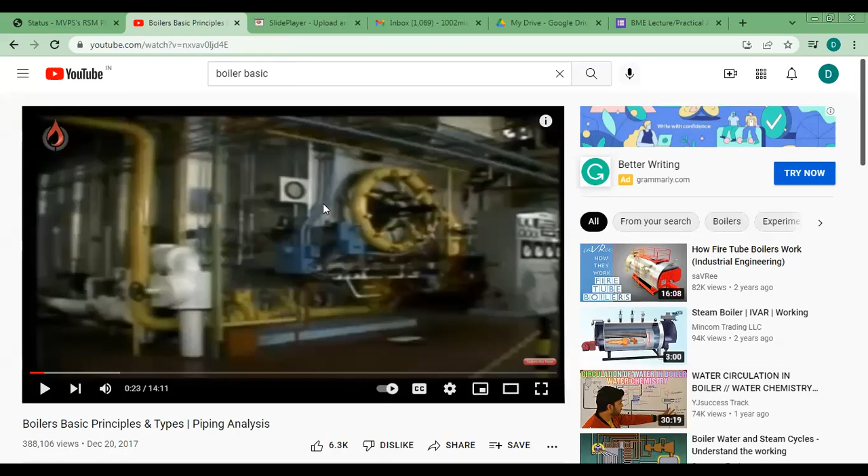Okay students, for the basic concept about the boiler, I will show you this short video.

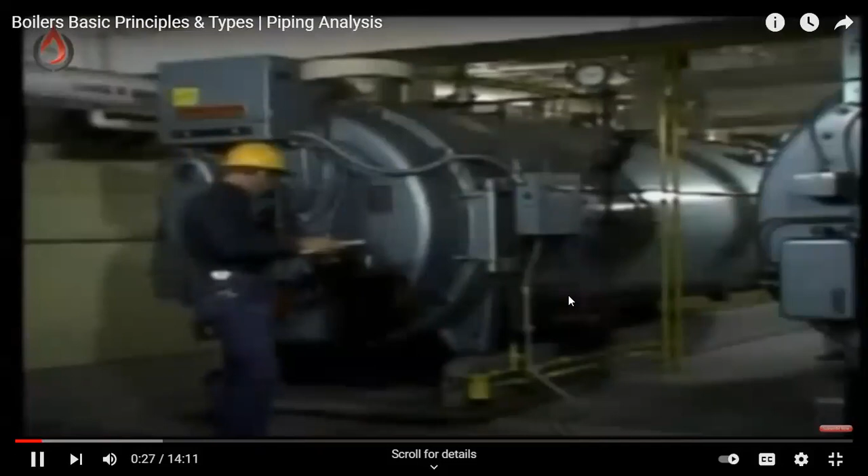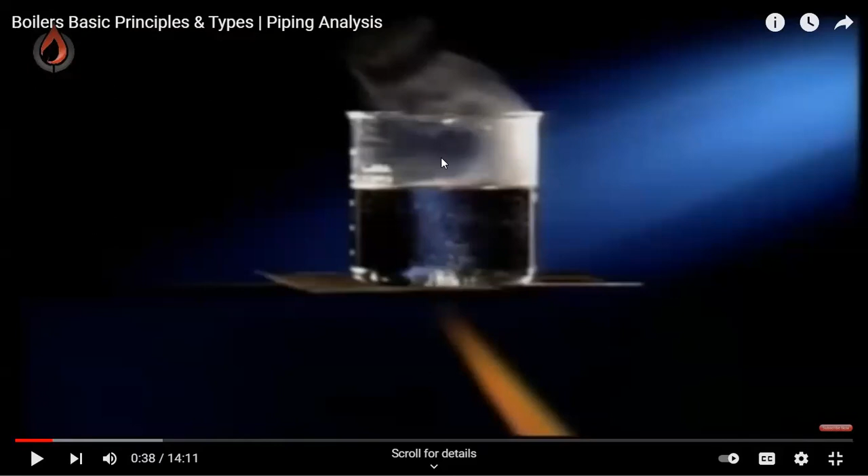In this process, what we can see is we give heat to the water and the water converts to steam. This is the simple phenomena: when we increase the temperature of water, the water converts to steam, and this phenomena works as a steam boiler. So the meaning is that we can generate steam by increasing the temperature of the water.

The same method or technology is used to generate steam in a boiler. So a boiler is nothing but what its name explains - boiler means boiling. The boiler is the equipment which boils the water. Now, many other equipments are there which also boil water, but...

they don't call those a boiler, because a simple vessel is also used to boil water and convert it into steam, but we can't say that vessel is a boiler. A pressure cooker also converts water into steam, but a pressure cooker is not a boiler.

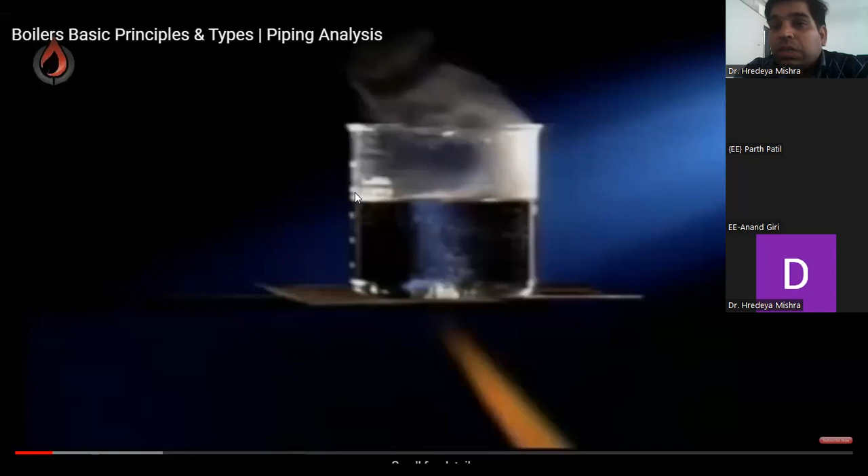So what is the boiler? The definition is: a boiler is a device or equipment which converts or generates steam at a specific pressure, with a minimum pressure of 1 bar. So if equipment generates steam at a specific pressure of 1 bar, then only we call it a boiler.

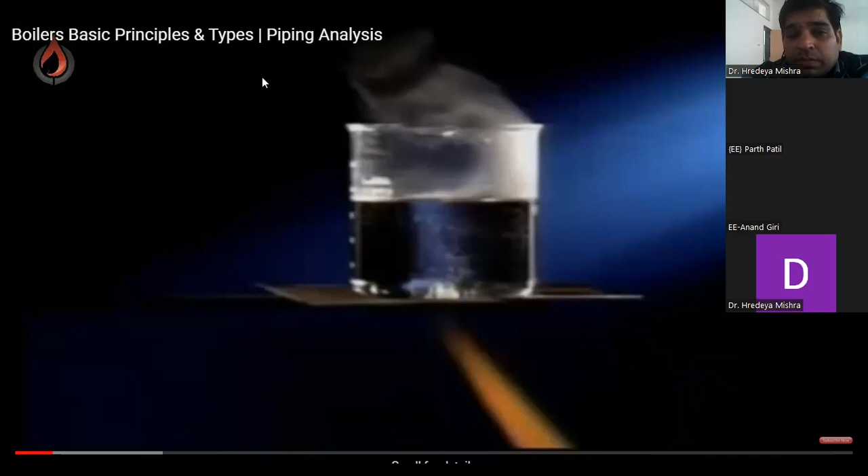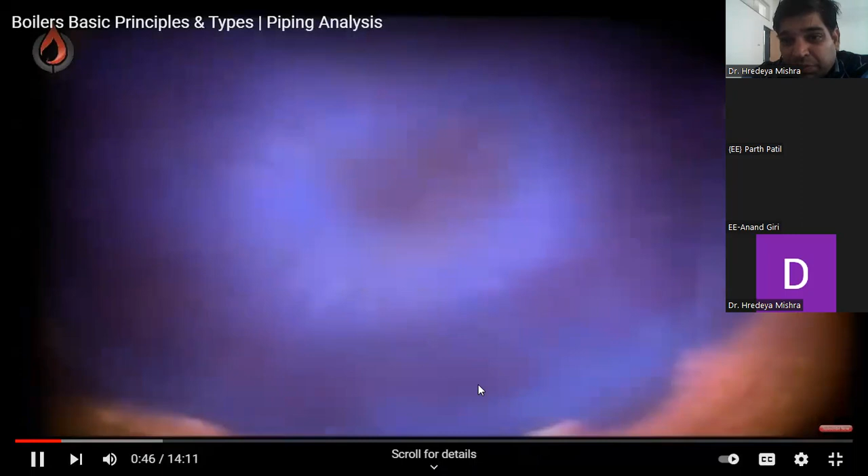Okay, see this video. Steam is generating here, and this is the flame. By this flame, water is boiling, and the phase is changed from liquid to vapor.

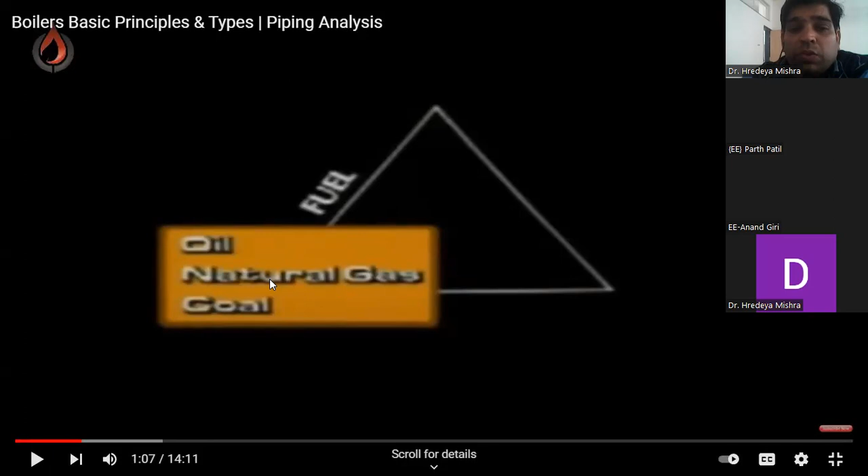Now see the cycle: fuel. What we can use as fuel - oil, natural gas, and coal. Air, oxygen, because in the absence of oxygen, fire is not generated. For fire generation and fuel burning, oxygen is required - that is the air.

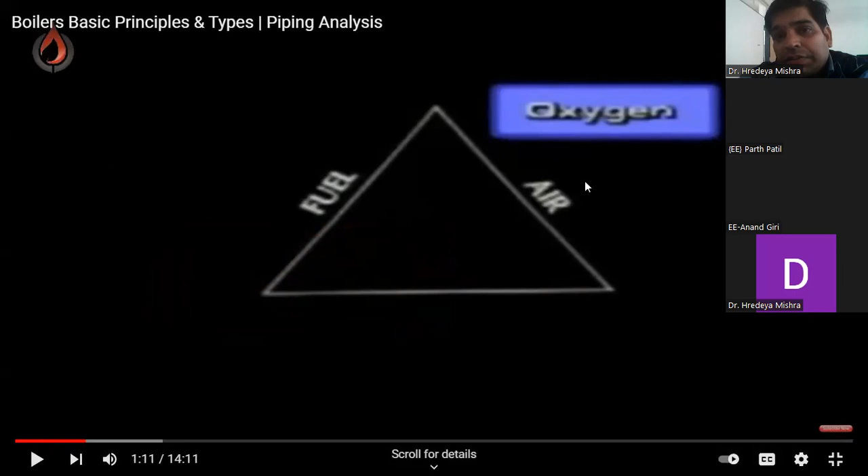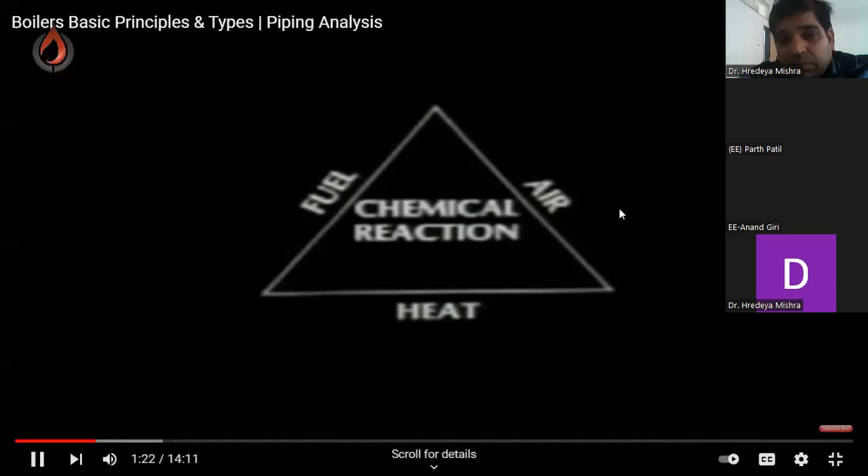And heat. See - heat, fuel, air, and now this chemical reaction happens. And what does this chemical reaction do? This chemical reaction heats up the particular vessel or boiler.

Now this is a closed vessel, but what happened here? This is the closed vessel, but for the presentation purpose, this section is open. So from this, we create the heat, and now the water is boiling, and see here the upper portion is generating steam.

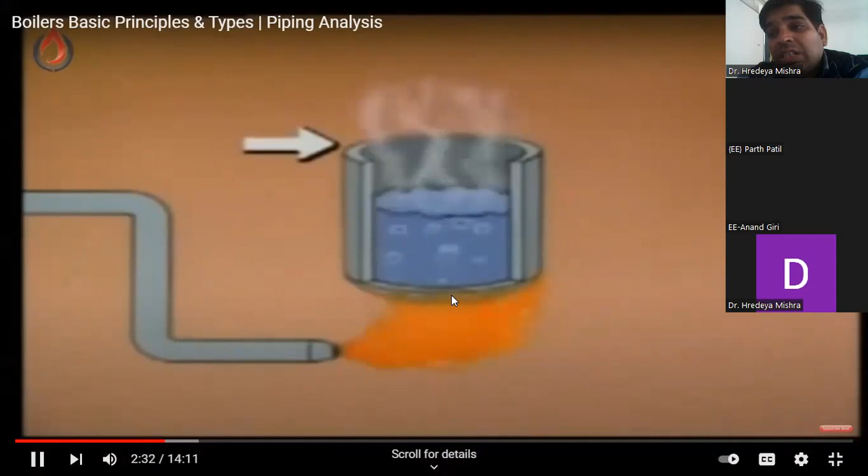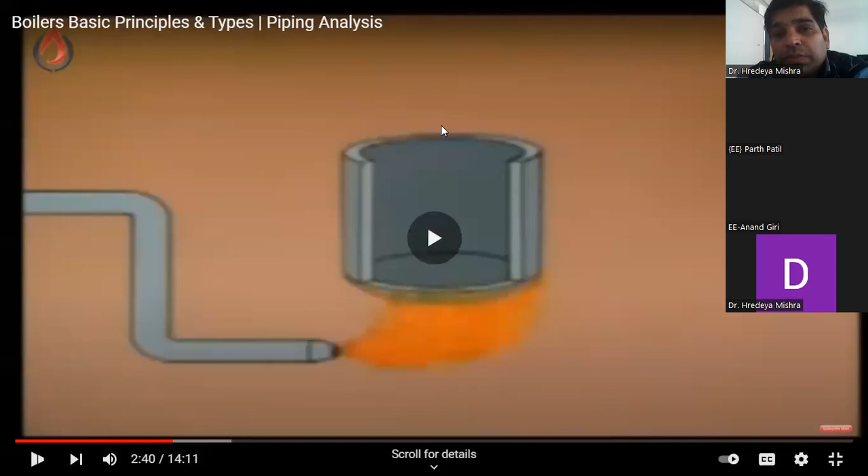Now see, in the previous example, the upper portion is open. In this section now, what we can do is provide a cover on the upper side and make a pipeline to supply the generated steam.

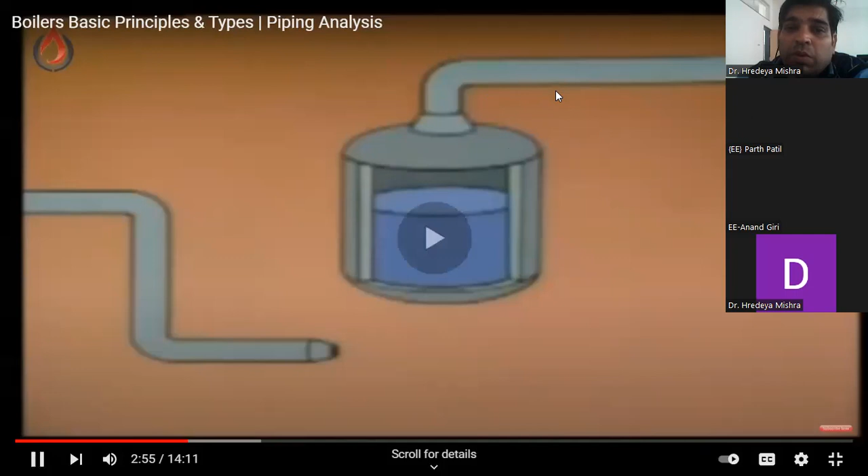Now what happened - you can observe that this pipe is for water supply. In the previous example, the total water was converted to steam and the vessel became dry, meaning without water. Without water, the vessel would be damaged. So this is the water supply - continuous water supply is there.

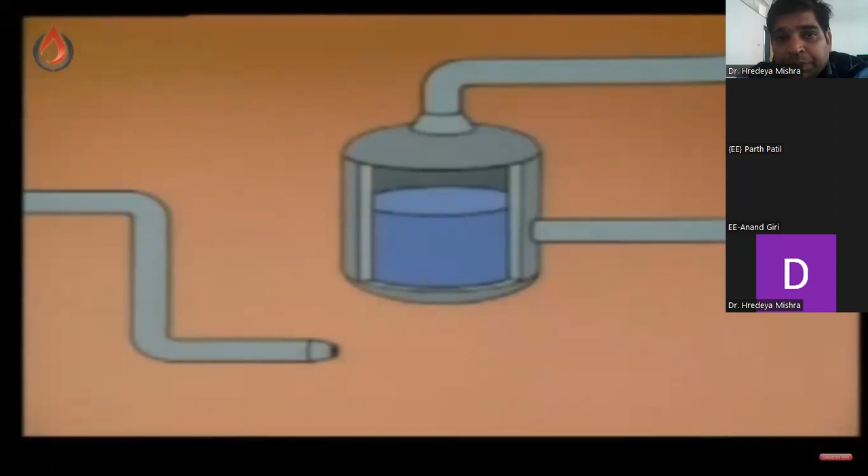So we maintain the water level, and here what happens - flame is generated, and this available water converts to steam, and this steam is transferred through this steam pipe. Now observe this operation: the water supply is continuous, so the water level does not reduce, and steam is properly generated and passed through this steam pipeline.

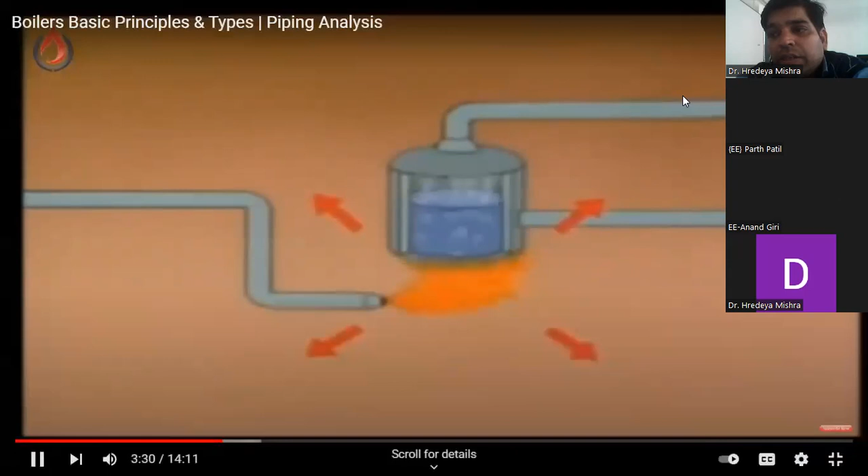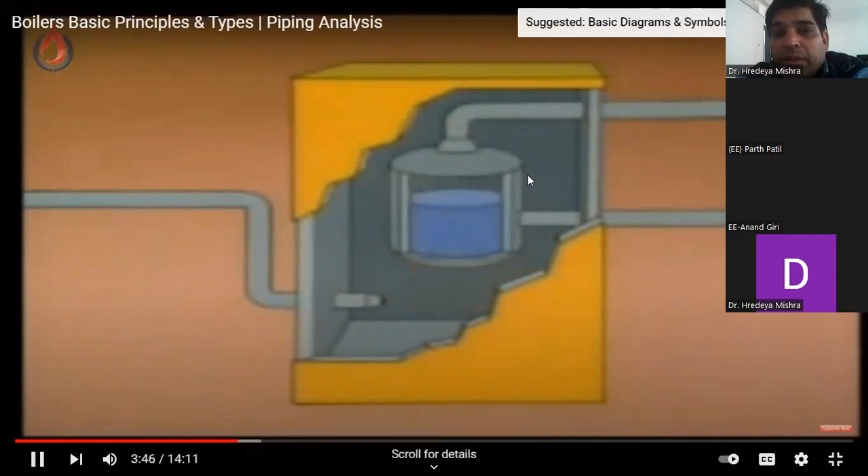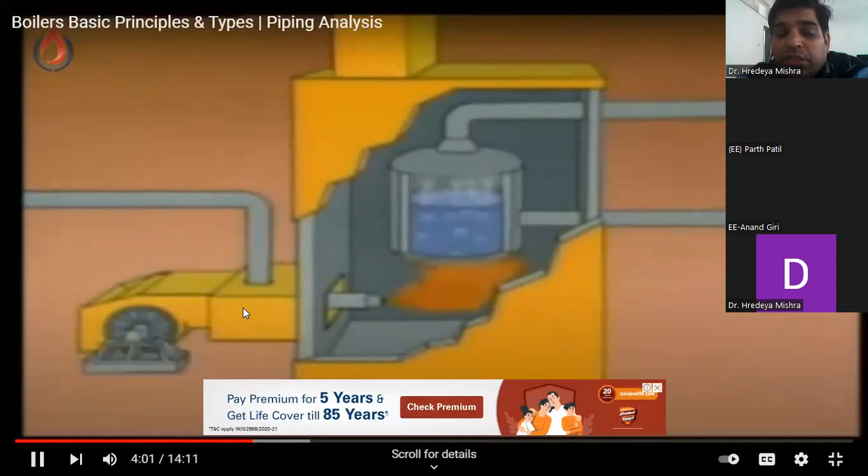Now what happened - we close all this system, meaning the flame, water chamber, and this all combine in a chamber. All this assembly combines in the chamber, so that we call it a boiler. Now see here, this is the combustion chamber, made here, and here is the burner. So you can see what operation is done - how a simple phenomena, water converting to steam, makes a boiler system.

So the basic things for how a boiler system is generated: we can see a combustion chamber is needed, a water supply pipe is needed, a steam supply is needed, and a vessel where water is collected is needed. The fuel is burned and flame is created, and this flame heats up the water, and the water converts to steam, and we can store the steam in a particular vessel and supply it as per requirement.

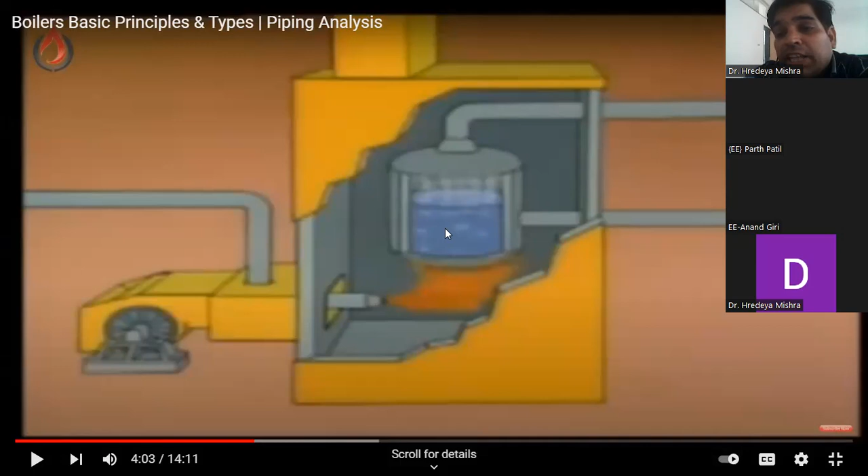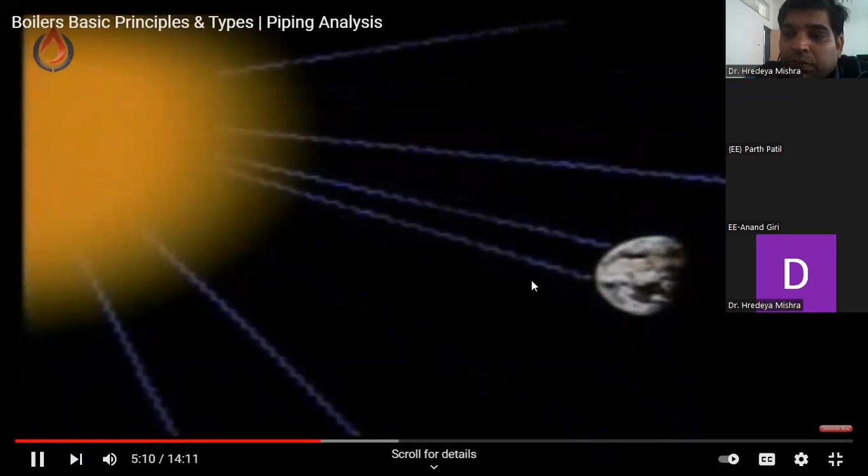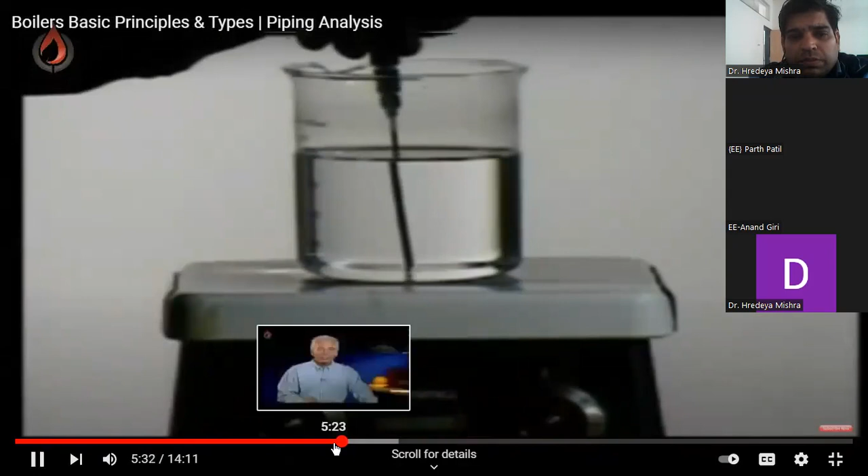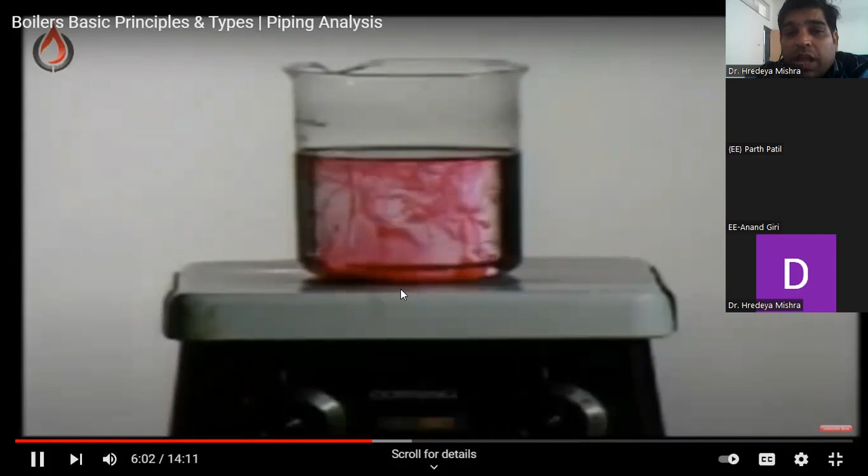Now again, see this simple operation, a simple experiment. We take a water vessel, add color. Just put it in, don't mix it, and we increase the temperature. So due to the temperature difference, what happens? The color mixing happens automatically. We don't move the water, but the water particles move due to the temperature difference. Increase the temperature at the bottom, and what happens? The color gets mixed.

So this is the basic operation regarding the boiler.

So what can we say if we're trying to give a definition of a steam boiler? The boiler is the equipment which produces steam at a high pressure. If a device generates steam with a specific high pressure, then it is the boiler.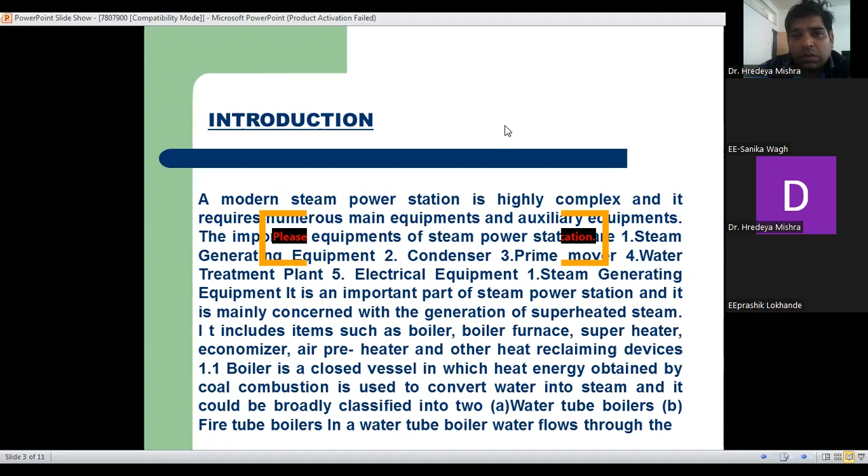So what is the main equipment used in the power plant? One, steam generating equipment, which is nothing but a steam boiler. Two, prime mover, water treatment plant, and electrical equipment. One, steam generator.

So what is the steam generator now? Steam generating equipment is an important part of a steam power station, and it is mainly concerned with the generation of superheated steam.

So what is the main purpose of the boiler or steam generator? Between the steam boiler, sorry, steam generator - whatever vessel is there, that is also a steam generator. We supply heat and water converts to steam, so we call these steam generators. But in a specific power plant, we need a boiler to produce dry steam or superheated steam.

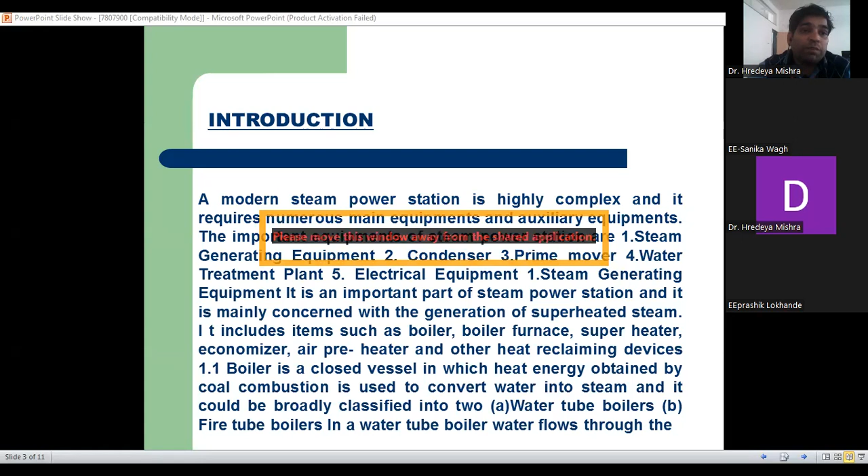The difference is that when we say water tube, water runs in the tube. To memorize the definition, water comes first, then tube - water runs in the tube, that is the water tube boiler. And fire tube means fire running in the tube. When water runs in the tube, that is the water tube boiler; when fire runs in the tube, that is the fire tube boiler. So we'll talk about the details of these types.

So the dry steam is supplied to the steam turbine, and they rotate the turbine, and this rotation goes through the generator, and what happens? The generator generates electricity. High voltage electricity is generated.

So the main important thing for any power plant is the method by which we rotate the turbine. By rotating the turbine, mechanical energy is generated, and this mechanical energy is converted to electricity through the generator.

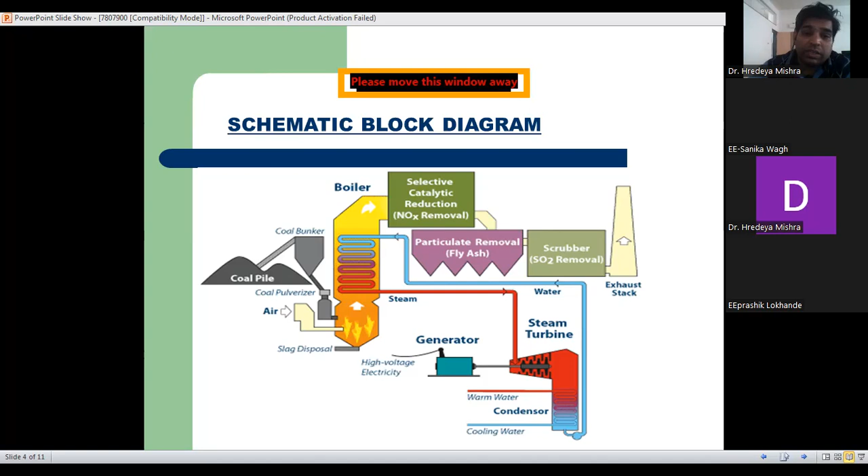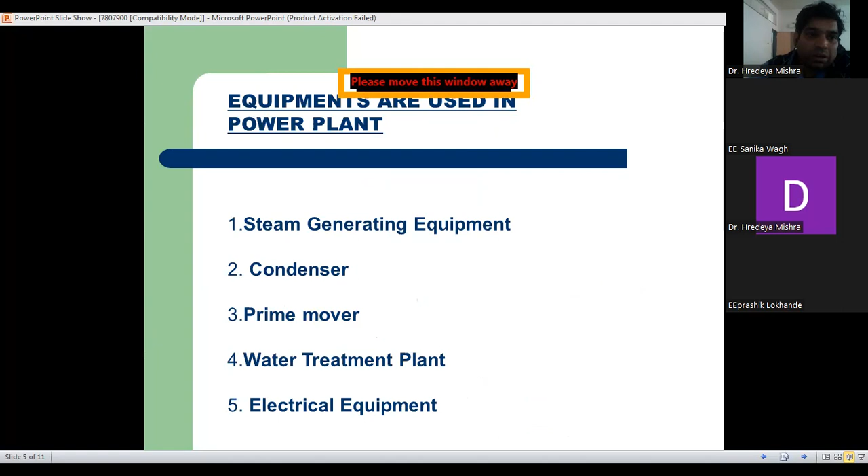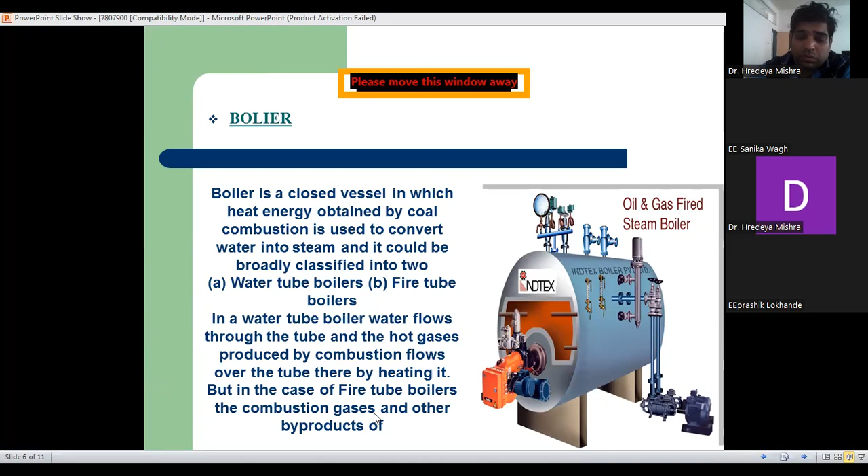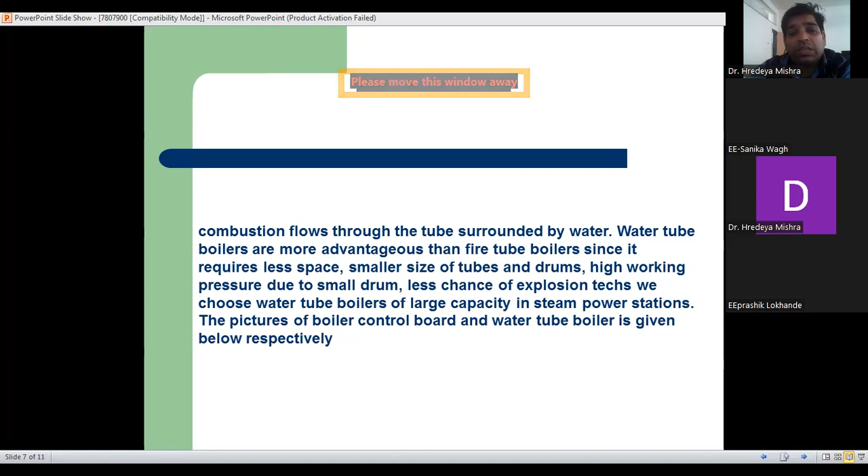Combustion flows through the tube, surrounded by the water. Water tube boilers are more advantageous than fire tube boilers since they require less space, are smaller in size in terms of tube and drum, have high working pressure due to the small drum, and have less chance of explosion. So we choose the water tube boiler for large capacity in the steam power station. The picture of the boiler, control board, and water tube boiler is given below respectively.

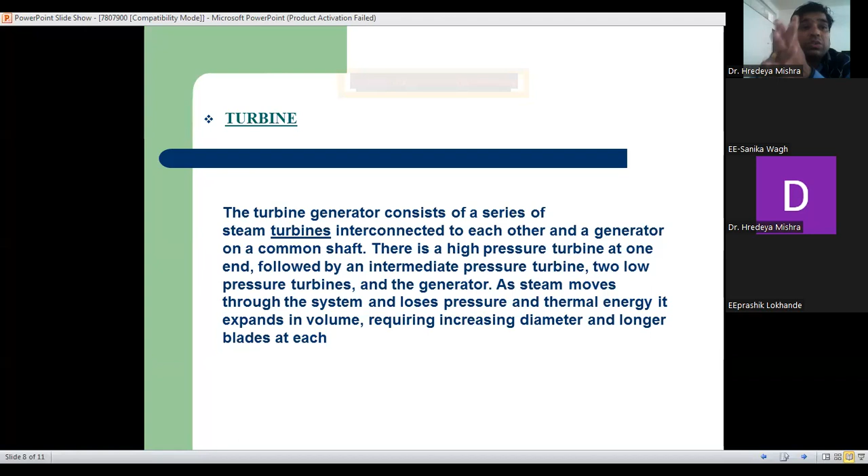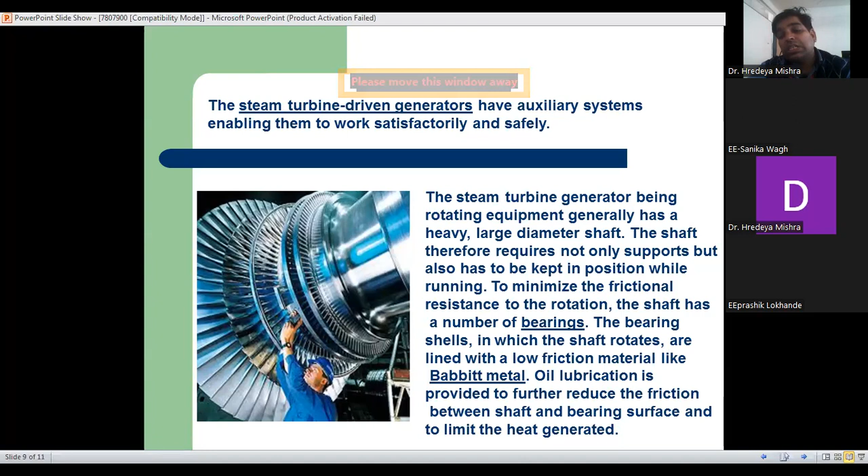Now we talk about the superheater. A superheater is a device used in the boiler to generate superheated steam. So what happens in the basic process is water is converted to steam. The temperature of boiling water is 100 degrees, and the generated steam is also at 100-degree temperature. So we again heat the steam and increase its temperature, until all the water molecules are removed from the steam, and we get superheated steam, or fully dry steam. This dry steam is supplied to the turbine.